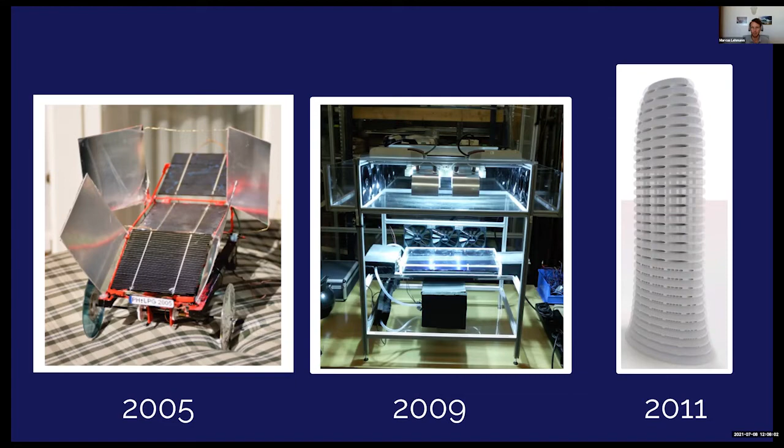Briefly to my background, I started working in renewable energy back in 2005 as a final project of my high school time. I built a solar race car, learned about the IPCC and climate change, and then decided to focus my career on developing solutions to tackle climate change. I started in mechanical engineering, and that path led me to ocean-based solutions to tackle climate change.

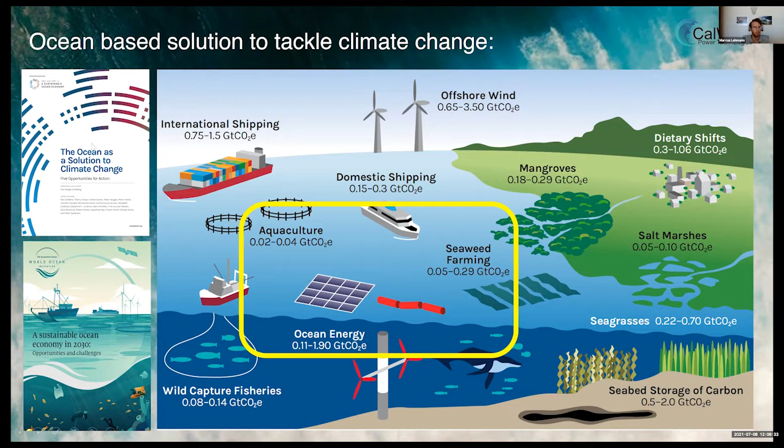This is a really great graphic showing the carbon sequestration potential of the different solutions. Here, ocean-based aquaculture, seaweed farming, and ocean energy offer an enormous amount, with up to 2 gigatons of CO2 sequestration. This is from the report of oceanpanel.org.

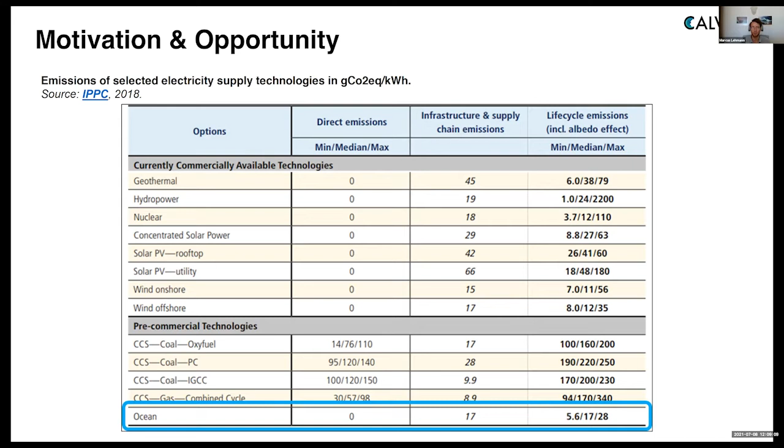The IPCC also found, from a pure life cycle emissions perspective, that ocean energy has the lowest amount of emissions per kilowatt hour produced, significantly lower than rooftop solar at 17 grams from an infrastructure perspective, with ocean energy as low as 5.6 grams CO2 per kilowatt hour. That's another motivation for us, as this could really be a long-term provider of clean energy at the lowest emissions.

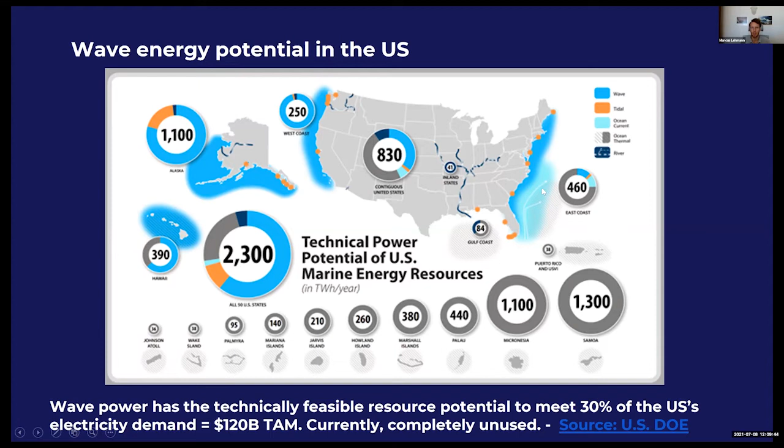A general additional advantage of wave power, next to the higher energy density and lower emission profile, is the stable and abundant nature of the production profile. We can produce power at night as well as in winter, which is a great complement to wind and solar production profiles. This is one of the big challenges: finding renewables that can secure 24/7 all-year-long access to clean energy.

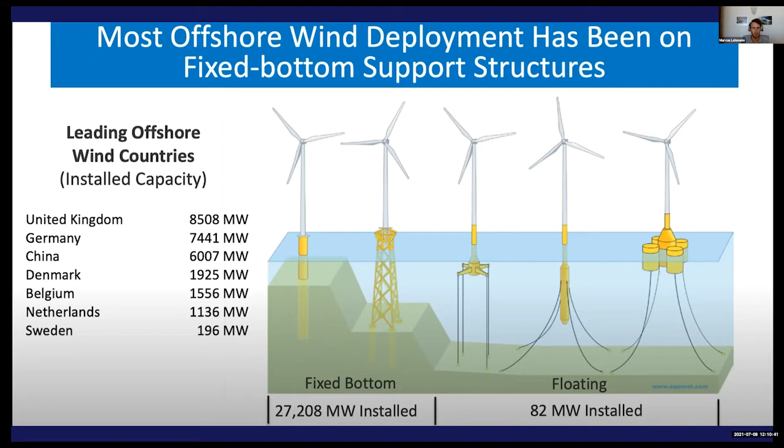Offshore wind is now finally also progressing in the US. Here are the different architectures, from fixed to floating. Mostly we've seen around 28 gigawatts globally in fixed-bottom offshore wind, but now also floating, especially for the West Coast in the US, where floating technologies will be required.

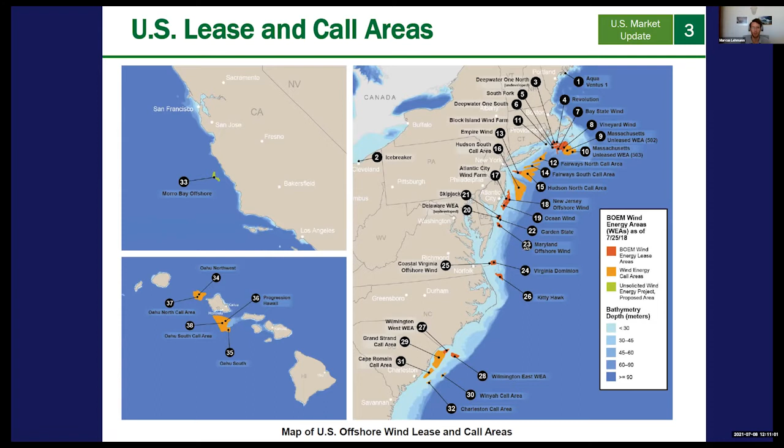Here's a general map of offshore wind in the US, showing current BOEM lease areas as well as areas under investigation. I think this map is slightly outdated—there are 2 or 3 areas on the West Coast in California currently being investigated for floating offshore wind. For floating offshore wind, there are still different architectures: this UC Berkeley-developed platform from Principle Power, adapted from traditional offshore industries, as well as other concrete-based forms or spar-type technologies.

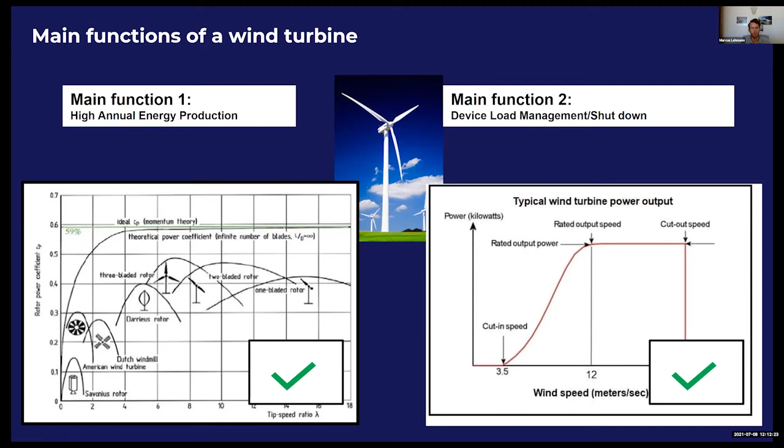The second feature that really led to the growth of the industry as a whole is the ability to shut off in storm conditions. Once a certain cutout speed is reached, the turbines are capable of effectively shedding loads on an aerodynamic level, turning the blades as well as the entire nacelle out of the wind with pitch and yaw control. These are the two critical features for any hydrodynamic renewable energy device.

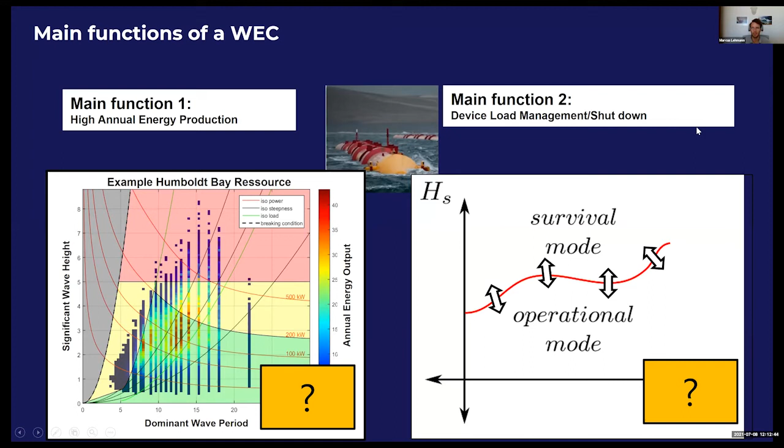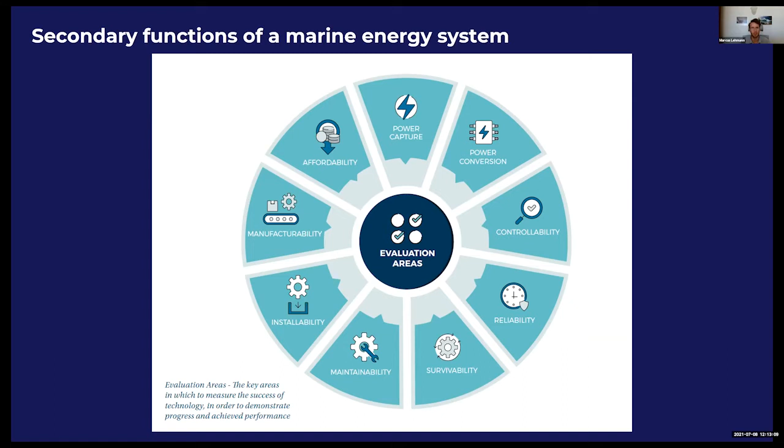For wave power, we're still lacking such a technology from a high performance perspective, as well as that ability to shut down, which is even more critical for wave power since storm events are significantly more severe than the largest winds turbines experience. On top of that, it's really a multi-domain challenge—next to power capture, conversion, and control, we have to meet reliability, survivability, installability, manufacturing, and of course cost. This is really a complex multi-domain systems engineering challenge as a whole.

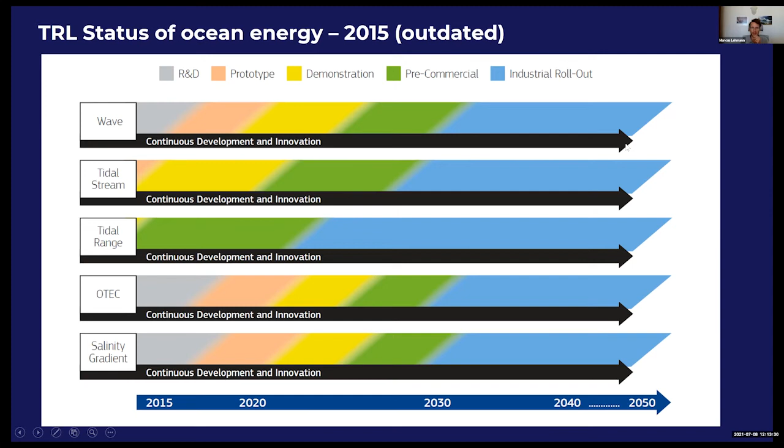As a brief update on the different types of ocean energy: next to wave, there is tidal stream, tidal range, OTEC (ocean thermal), and salinity gradient. Wave is a little behind in terms of commercialization, with tidal stream and tidal range being the most advanced at the moment. The latest statistics from 2020 show we're now at around 36 megawatts cumulated installed capacity for tidal stream, and around 23 for wave power.

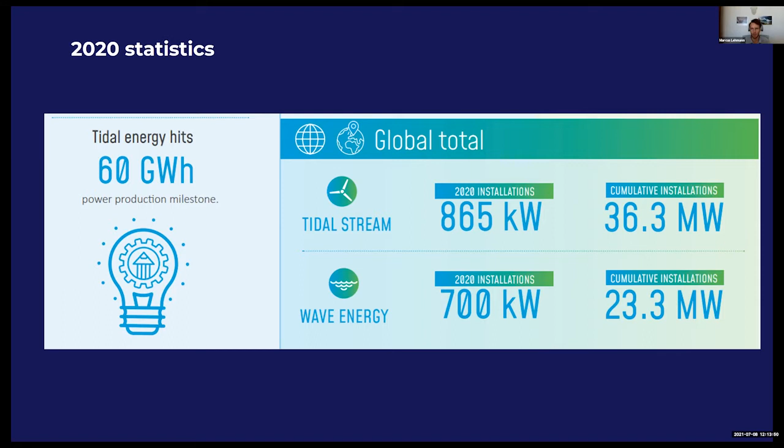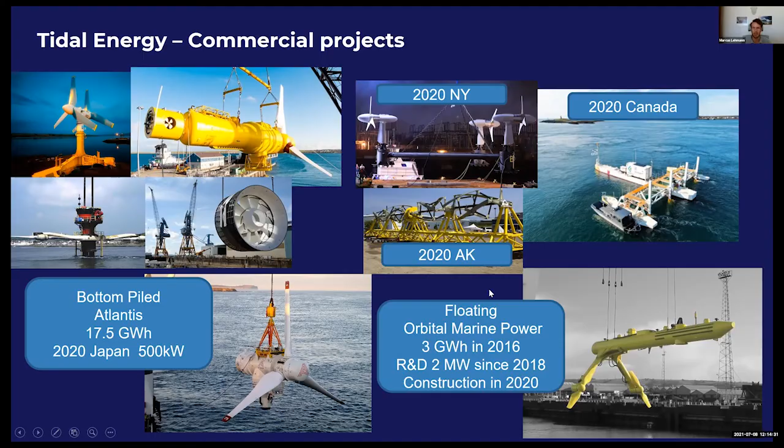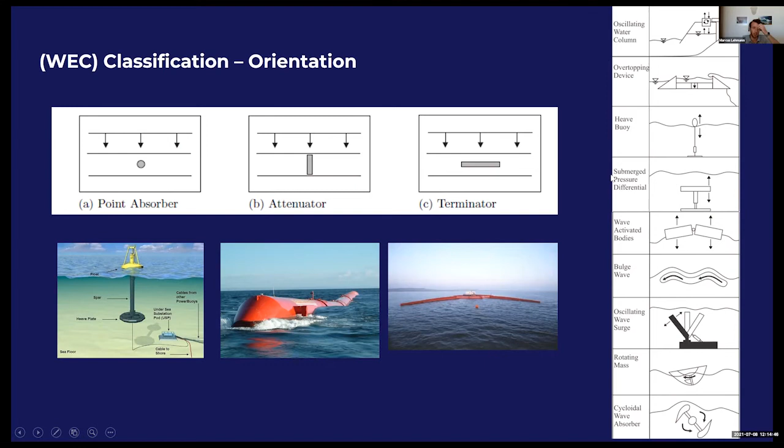For wave, it's not as clear in terms of architecture. We still have 3 very fundamentally different types: point absorber, attenuator, and terminator, and then all kinds of ways you can convert the actual motion into power. As said, it's still to be determined which of these will turn out to be the most cost effective.

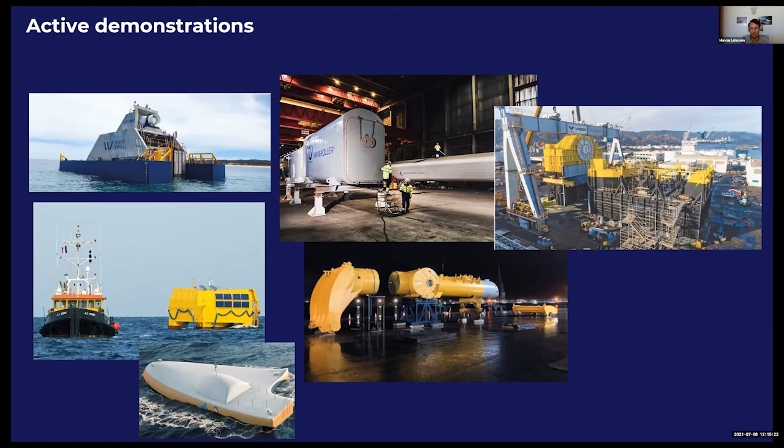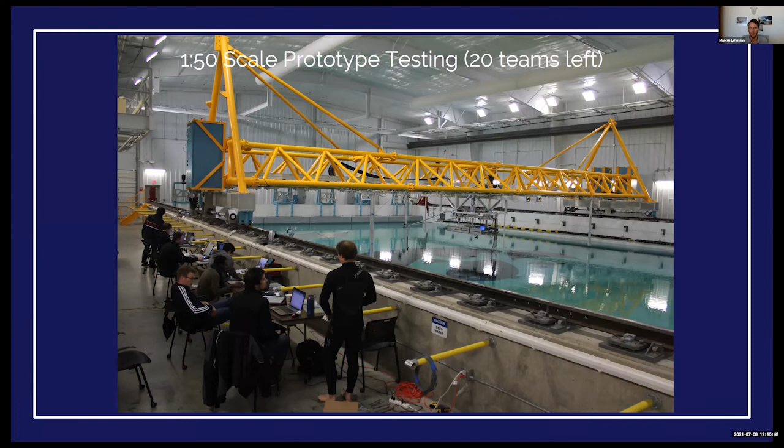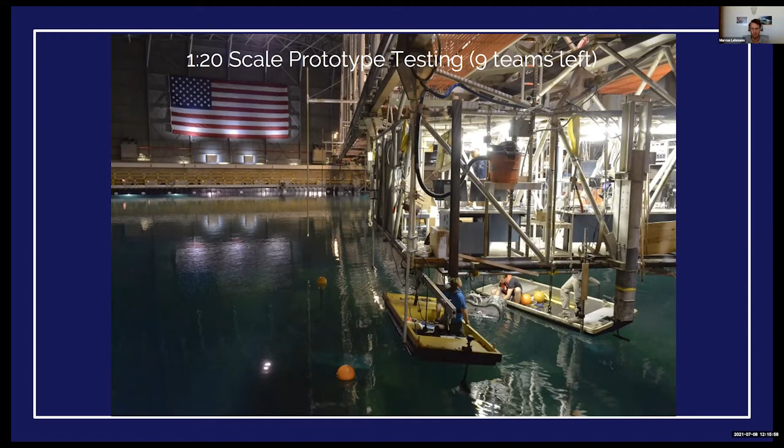We contested in a 1 to 50 scale laboratory test. This is from our test in Iowa in 2015, I want to say. And then we got invited to test the top 10 technologies at the largest Navy tank in 2016.

Our team did really well and was able to exceed the threshold and was awarded by the competition. So the initial 4 of us were Nigel, Brian, Thomas, and myself in the Wave Energy Prize. Dan joined us in '18 and Josiah in '19.

The core expertise we've developed spans 6 to 7 technical areas: resource analysis, hydrodynamic modeling - which is really the core, including boundary element method, time domain simulations, as well as high fidelity CFD simulations, experimental validation of these hydrodynamic models, and then the implementation of the controls of the actual technology - how can we best convert and lead to the highest performance based on how we operate the device.

We call that a digital twin we've developed in time domain. For the actual equipment, we've designed computer-aided design, dynamic models, and then physical implementation of that in a controlled environment - this is at our bench facility at UC Berkeley civil engineering. We run this time domain simulation that then informs the actual actuation part, which drives our generator as it would be out in open ocean.

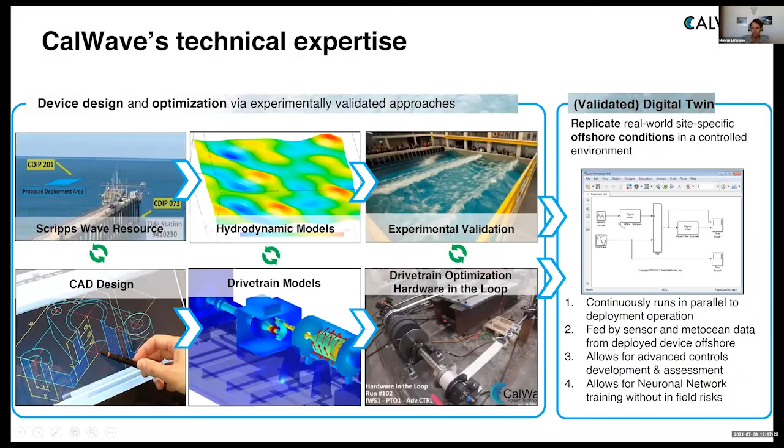We can measure the response and performance, and that again informs the actual simulation. This is an example video here from our bench: our time domain simulation informs the actuator, which really simulates the behavior of the system in an ocean condition. Then we measure the response and performance as well as control, which gets informed back into the simulation. We have a sophisticated setup here that's also being used for earthquake structural testing - a kind of hardware-in-the-loop setup.

This work has been done under a 2017 DOE award as a follow-up to the Wave Energy Prize. Then in 2019, we secured 2 additional awards to work on a second larger system. We're supported by the Sustainable Ocean Alliance, Breakout Labs, as well as the Autodesk Foundation, High Tide Foundation, and last year, 2020, this year...

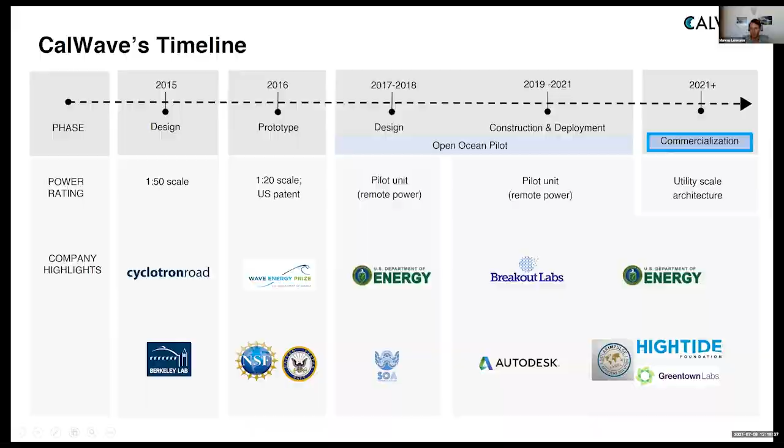PacWave, the first - it's really a major milestone for the wave energy industry in the US. It's the first grid-connected 20 megawatt test site in Oregon, located off Newport. They just received their FERC permit to connect to the grid, as well as their BOEM permit, and they're now actively working on installing the test site.

It's on the state of the science report, led in the US by the Pacific Northwest National Lab, collecting all the environmental effects of marine energy on the environment, here led by Andrea Copping. There was an updated report published in 2020, really showing the latest findings of all projects being recorded globally, and they're also collected on Tethys, the platform for findings here.

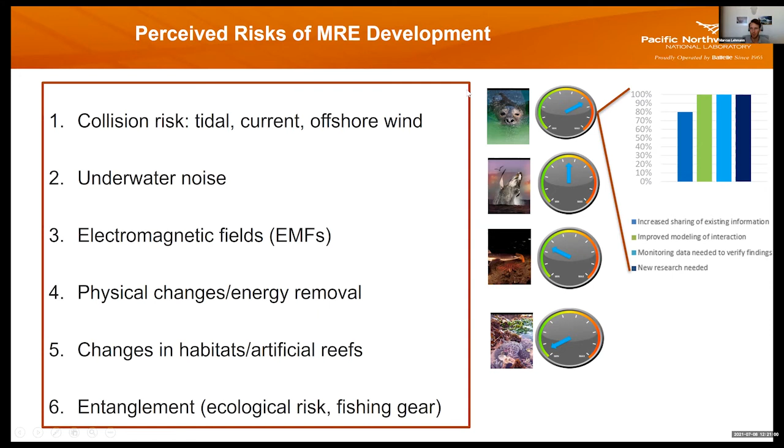Another concern that's often brought up is entanglement. Here, I think the main challenge is not so much the actual cables or mooring lines, but more that loose fishing gear gets entangled into these lines.

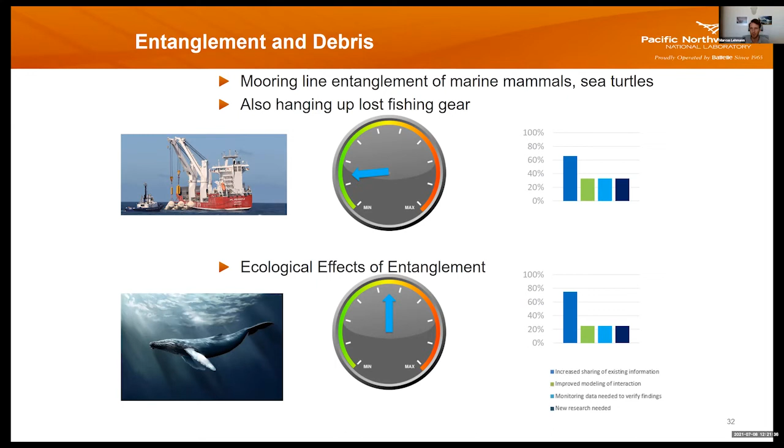And then a marine mammal gets entangled into that fishing gear. So there are solutions, companies working on tracking lost fishing gear, preventing that. But I think it's also important for developers to keep a close eye to prevent exactly that kind of entanglement to their mooring lines.

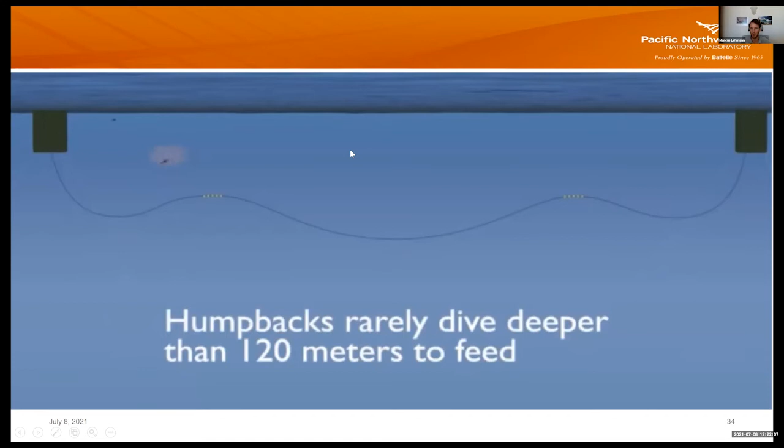PNNL is also conducting general simulations just to see the dynamic interactions and physical comparisons between, in this case, a 3-point catenary floating offshore wind platform and a humpback whale, as well as the cable interactions, and found that the dimensions of these cables are so large and stiff that the cables themselves have very low risk for entanglement.

Next to these, the Department of Energy has an initiative called the Powering the Blue Economy initiative, where they're investigating how marine renewables could support specific niche markets. One is power at sea, mostly I would expect most interesting to the Scripps community.

Here, ocean observation and underwater vehicles, as well as coastal communities, isolated microgrids, and disaster recovery, and then just seeing how these compare to distance to shore. We're seeing ocean observation underwater vehicles will be further out and less likely to have a cable from shore to sensor packages.

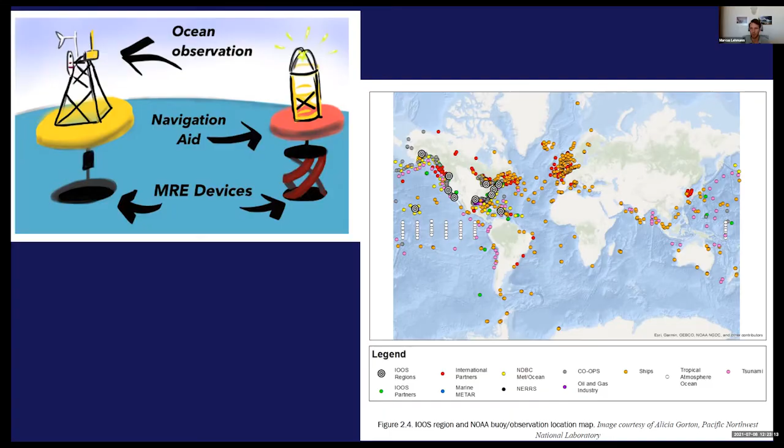Here are some examples from that report. Ocean observation can be supported by marine renewables, providing power for navigational aid or powering sensors. Another example is the harmful algal bloom tracking system, that could be upgraded with built-in power recovery from wave power next to traditional solar and micro wind.

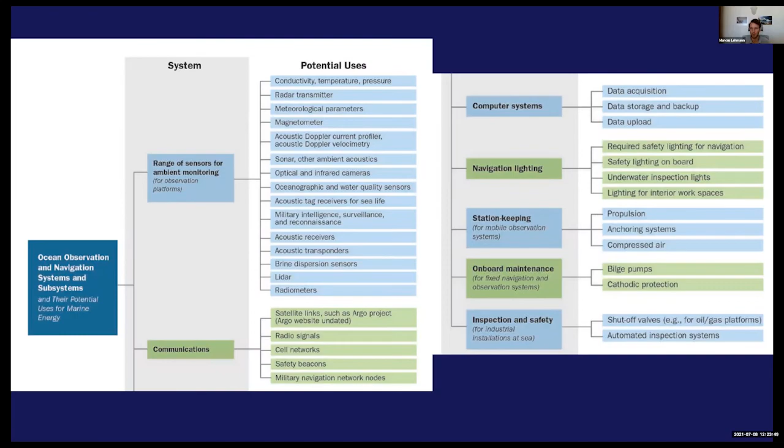Here's a good overview of different sensors the report has found, ranging from ambient monitoring to communication, computer systems, navigational light, station keeping, onboard maintenance, and inspection. That's a pretty comprehensive list of sensors being used in ocean observation that need power, and the same with underwater vehicles, as well as their charging stations to conduct long-term permanent resident studies.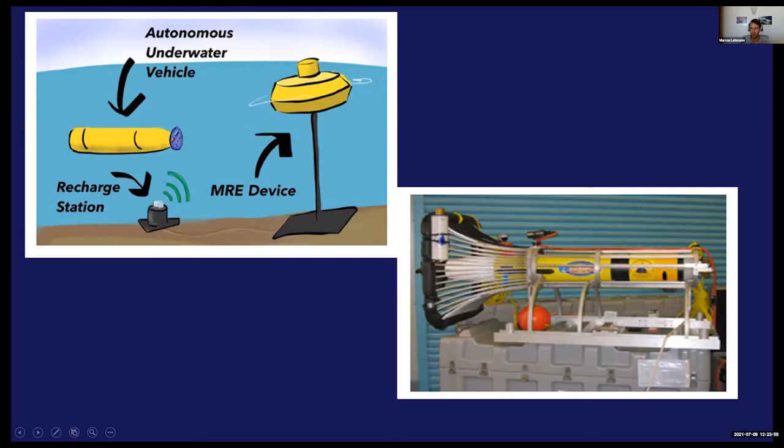But we lost our presenter there. Give us a few minutes and we'll get him back. You're back now. All right, great. Thanks, Marcus. Sorry about that. My Zoom crashed. That has not happened to me before.

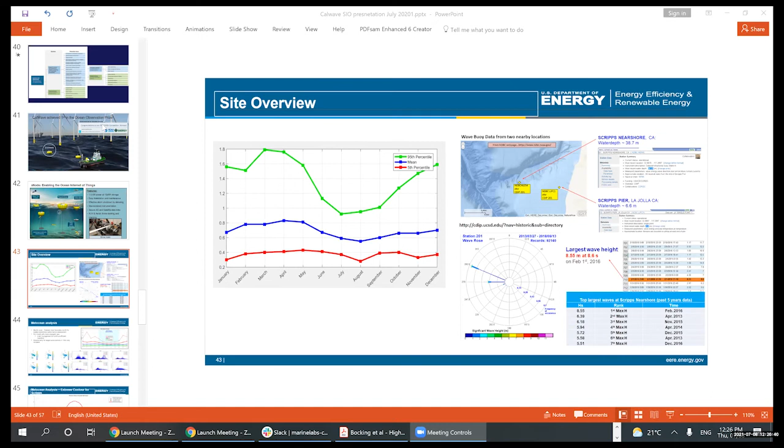On what slide did you lose me? Yeah, that's a good question. I don't recall right off the top of my head where we were in the presentation. I would go back to, looks like maybe slide 41. Okay, I see. Perfect.

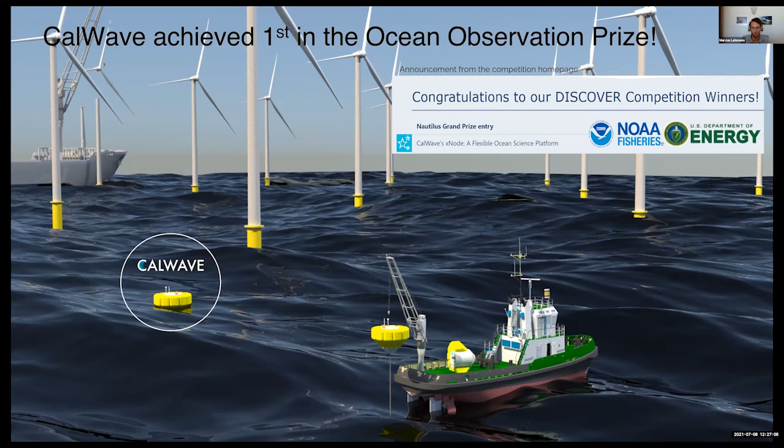Sorry about that. So one of these applications as part of the Powering the Blue Economy from DOE was the Ocean Observing Prize, hosted by NOAA and the DOE. We contested with a concept in the first phase, the DISCOVER phase, and were awarded for our xNode solution. The xNode is an IoT platform for long-term ocean observation, utilizing our wave power generation system to recharge onboard batteries, but it can also be upgraded with solar and wind, and can be used for all forms of sensors.

We have a variable payload compartment with access to the surface as well as above water, and can be equipped with all forms of sensors for long-term studies. We can compress data and export it via satellite or 4G. Another application could be to charge drones for permanent resident long-term studies.

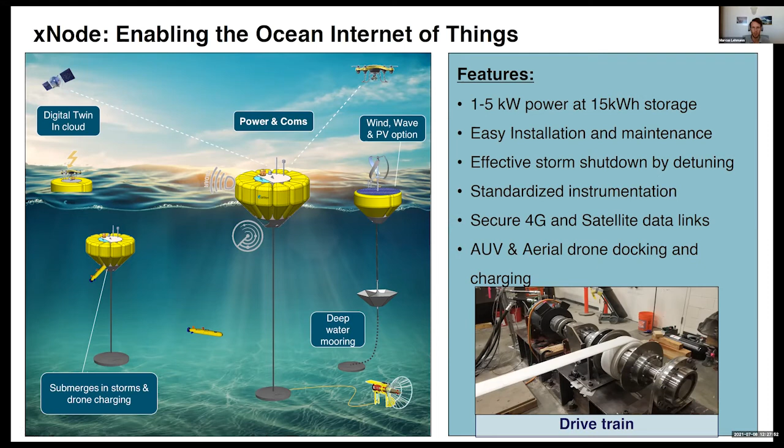Coming back to our deployment under the DOE award, we started out with a more detailed metocean analysis using the CDIP buoys indicated in the map, and conducted a hindcast analysis and wave rose analysis just to be sure we know where the waves are coming from. We're essentially right off that plateau before the canyon, so the waves predominantly come from the northwest direction, travel over the canyon, and then reach the test area.

That data was used to predict an annual profile, showing the most severe month expected, as well as a longer hindcast analysis for safety, looking at the most severe events over the last 5 years. We can see one of the largest waves recorded was 5 to 6 meters in the last 5 years.

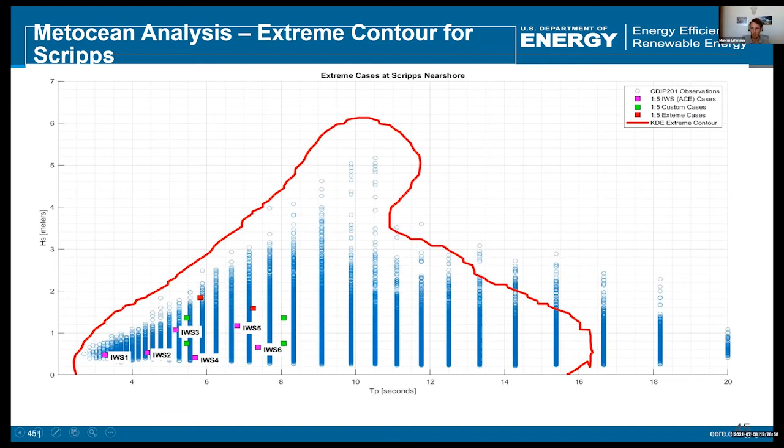Next to that hindcast analysis, we also started a local time series with Marine Labs. They donated one of their CoastScout buoys, as we see here on the bottom right. We were able to record real-time data last year and this year, including the storm from March this year, where we recorded a pretty large 2-meter wave that came in right off the test area.

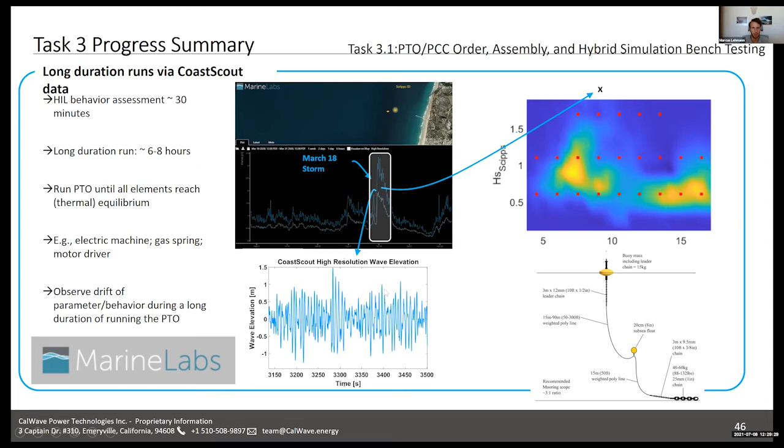That finding and all that data collected was also used for a publication at the European Wave and Tidal Energy Conference, called High Fidelity CoastScout Buoy Data Supporting a WEC Demonstration at Scripps Pier, showing exactly the environmental monitoring areas we've investigated, compared to the CDIP recordings as well.

Going forward now, once the assembly of our system is completed later this month, we're planning to ship it to the Driscoll Marina in Mission Bay, and then mid-August, in collaboration with the diving team and the boaster, tow the device to location and anchor it on site. We then plan to operate it for the 6-month test duration.

So with that, glad to open it to the Q&A session now.

We had a question from Isabel K: is the location essential? If the array extends south of the line directly west of the foot of the pier, it will be in the Matlahuayl State Marine Reserve, where I suspect deployment is less acceptable than in the San Diego Scripps State Marine Conservation Area, in which the pier itself is located. So to go back to that question: is the location essential at that site?

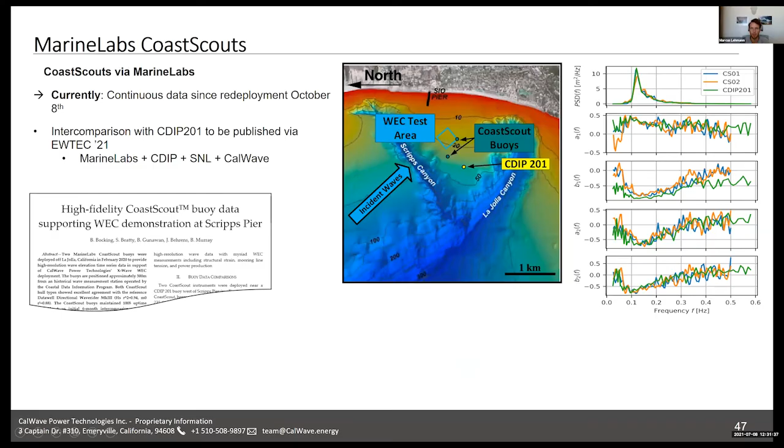Maybe I'll jump back to the map. Historically, how the project developed was that I was looking for wave data, and many years ago I got introduced to Julie Thomas from CDIP, and was just looking for near-shore data and SWAN models essentially. Julie mentioned, or essentially invited us, and said, hey, why don't you come down here, because we have all that historical data and many years of hindcast data, which makes the deployment significantly safer, because we can actually design for these extreme events that happen once in a while. That's how it came together.

That area was recommended in collaboration with Scripps as the best site for that short-term deployment, so we followed the guidance from the local hosts that suggested that area.

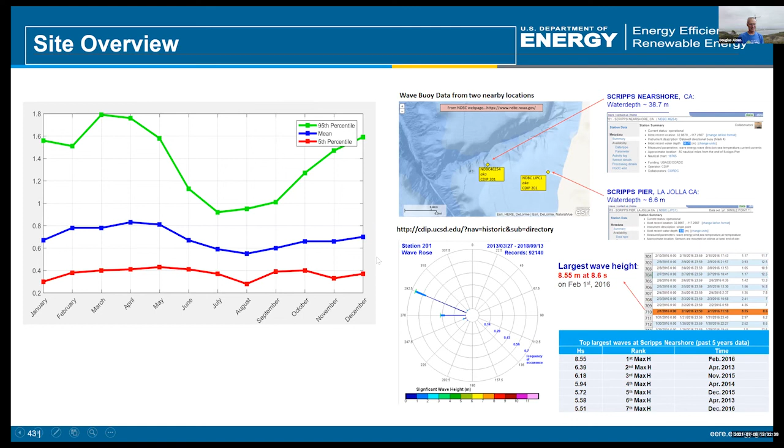There was another point: the graphic in slide 43 was generated by Randy Bucciarelli, and he was wondering if you guys could attribute that graphic when you give presentations. Certainly - I borrowed that slide from our DOE updates that were internal, but I'll make sure to give credit to the origin.

Alexander is asking: long-term, is the vicinity of the Scripps Pier a viable area for larger scale wave power? Would UCSD have the ability to install wave generation for campus electricity generation?

That's a difficult question. From a first gut reaction, I would say most likely not. This is an area dedicated for research. Getting the permits like PacWave did in Oregon takes a lot of stakeholder engagement, permitting, and siting, making sure all local stakeholders are involved. Potentially further out in the long run, but as of now I'm not aware of any grid-connected projects being investigated. There was a study done by a group around San Luis Obispo who looked at the pier at Vandenberg, which was essentially also a contestant for a grid-connected wave farm, similar to PacWave, and they've done the most advanced work in California next to Humboldt Bay. PG&E did a study called Wave Connect, looking into a farm similar to PacWave many years ago, but I think the most likely site would be off Vandenberg.